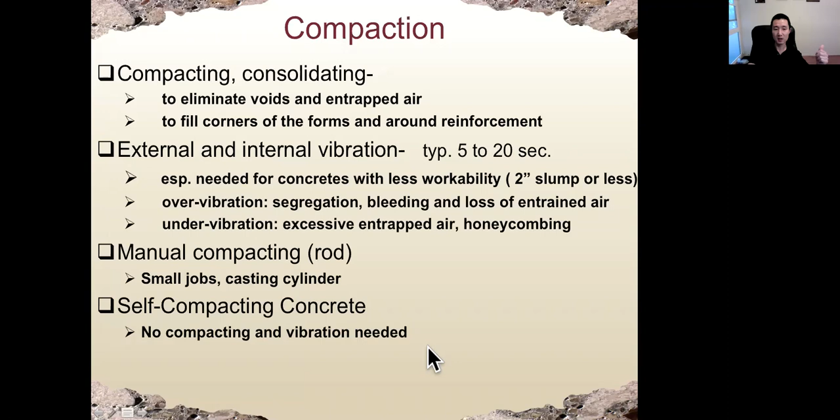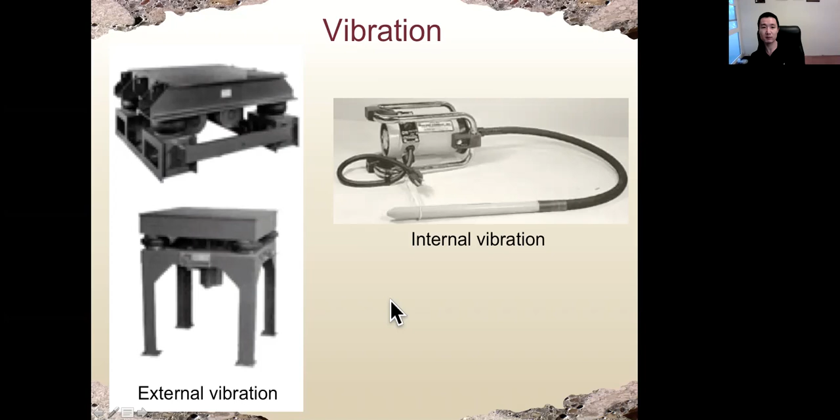So compaction is relatively simple compared with curing. Let's look at curing next.

The reason we cure the concrete is to prevent loss of moisture from concrete. Remember, hydration, which is the chemical reaction between water and compound in cement, needs water, at least 5 to 7 days -- the longer the better. Inside of concrete, if the internal relative humidity is less than 80%, the hydration process will stop. So that's one of the major reasons we need moisture at the early age of concrete.

Another reason is to reduce the potential for shrinkage, including plastic shrinkage and drying shrinkage -- we're going to talk about this more when we discuss shrinkage of concrete. But if the concrete loses moisture, it tends to reduce its dimension, we call that shrinkage. Too much shrinkage and the concrete will crack, because concrete is very weak under tension.

That's one reason: prevent loss of moisture from concrete. Another reason is to maintain a favorable temperature for a certain time, normally around 1 week. If the temperature is too low, below freezing, the concrete will first stop hydration, and second, it may crack because when water becomes ice, the volume will expand. We call that freeze and thaw attack. It is dangerous, especially when concrete is young at early age, so at early age the concrete cannot be frozen.

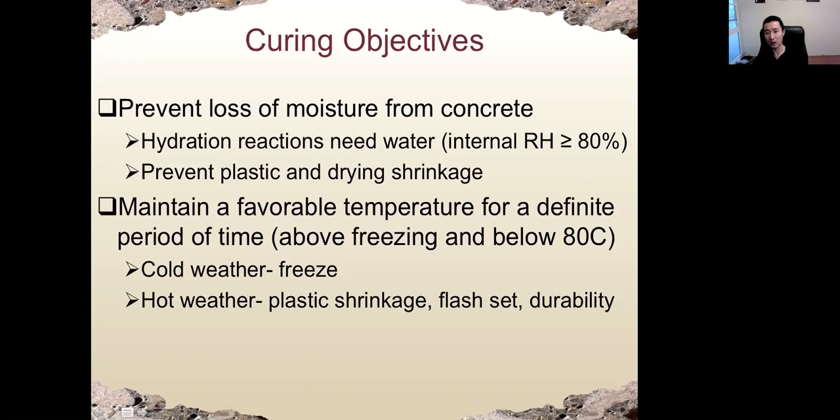A good curing requires 3 things. One is the moisture, the water. The second is temperature, cannot be too low, cannot be too high. And the third is the time should be long enough, at least 5 to 7 days. If any of these 3 factors -- moisture, temperature, and time -- is missing, the desired property may not be achieved. This is very important. Even if you design very good concrete, cast it perfectly, and compact it perfectly, if the curing is not there, the strength and other properties cannot be achieved. So curing is very important.

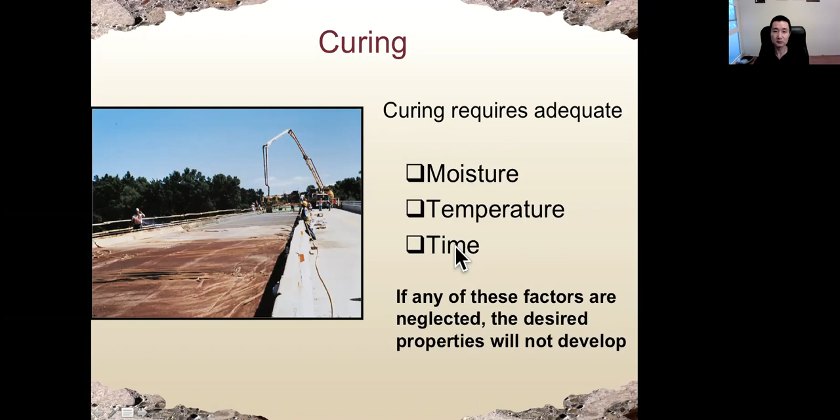All right, so effect of adequate curing on hardened concrete. A good curing will increase the strength of concrete because more moisture, moderate temperature, and long enough curing will ensure the hydration will go on. So we have more hydration product, the strength will be there.

It will also reduce the permeability, because again we have more hydration product. The porosity of concrete will be lower, so the concrete becomes less permeable. We also call that increased water tightness.

Because the strength is higher, abrasion resistance of concrete will also be higher. The resistance of concrete to freeze-thaw will also be higher, because first of all, concrete is stronger, and also it is less permeable. So water will have a harder time to penetrate the concrete and do the damage.

It will also increase the volume stability, which means we have less shrinkage. We have different types of shrinkage, including plastic shrinkage, which is shrinkage at early age of concrete, when the concrete is still in plastic state, or drying shrinkage, which is the shrinkage when concrete dries out and the water evaporates to the air. We call that dry shrinkage.

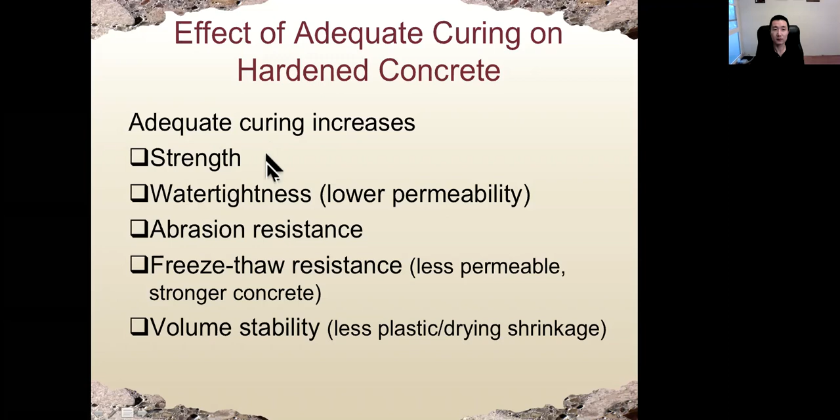All right, so let's look at these figures. Here shows the effect of moisture curing on compressive strength of concrete. The y-axis is the strength of concrete, and the x-axis is the age when we test the concrete strength.

So all four concrete, these four lines, have the same mix design: same amount of water, same amount of cement, sand, and of course aggregate. The only difference between these four concrete is the length of curing. The yellow line is the concrete in the air the entire time, so no moisture curing at all.

The green line is in the air after 7 days of moisture curing, so this is typical curing time, around 5 to 7 days. The red line is the concrete in the air after 28 days moisture curing. And the last one is moisture curing the entire time before we test its strength.

So again, all the concrete has the same mix design, but obviously the strengths are quite different. What we can see here is the longer we moisture cure the concrete, the strength will stop increasing at a later age. For example, the concrete cured in moisture all the time, the strength almost keeps increasing over a year. So as soon as we stop moisture curing the concrete, the strength will stop increasing almost immediately.

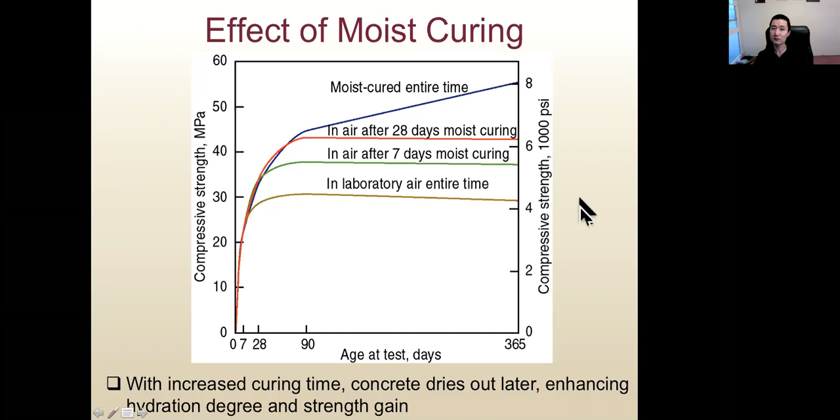And this slide shows us the effect of curing temperature on strength. Again, all these 1, 2, 3, 4 concrete have exactly the same mix design. The only difference is the casting and curing temperature. For example, the red one means the casting temperature is 23 degrees Celsius, or 73 degrees Fahrenheit, and the curing temperature is the next temperature, also 23 or 73 Fahrenheit.

All right, so the red line is the concrete cast and cured at room temperature, around 70 degrees. The blue line here is we cast the concrete and cure the concrete at 90 degrees Fahrenheit. So compared with the red line, the early age strength, which is the strength for the first week or so, will be higher.

It is easy to understand because increased temperature increases the speed of chemical reaction, so we have more hydration product and the concrete will be stronger. However, the strength after around a week or so will be lower when we increase the curing temperature.

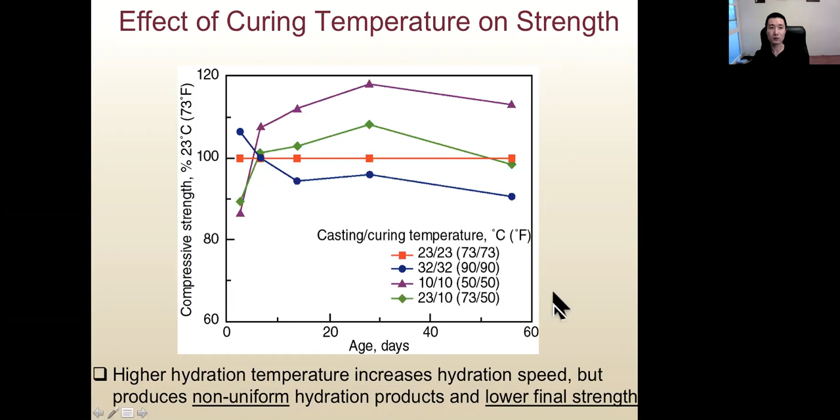So the temperature effect on curing, here is a summary. The higher the temperature, the faster the curing. The higher temperature, we have faster hydration speed. The best temperature is room temperature, which is very convenient for us.

The stronger concrete is made at temperature around 40 degree Fahrenheit. The freezing temperature is 32, so it's just above the freezing temperature. But it is not very practical to cure the concrete around 40 degree Fahrenheit. The stronger concrete is made at around that temperature, just above freezing. That is because hydration will keep going on since the temperature is not too low, above freezing, but it is very slow, so we have very homogeneous hydration product.

But the best temperature is still room temperature because it's very practical. We don't have to do anything to achieve that. If the concrete freezes during the first 24 hours, when the water becomes ice, hydration will stop, so it may never be able to attain its original properties. So keep the concrete above freezing temperature at early age.

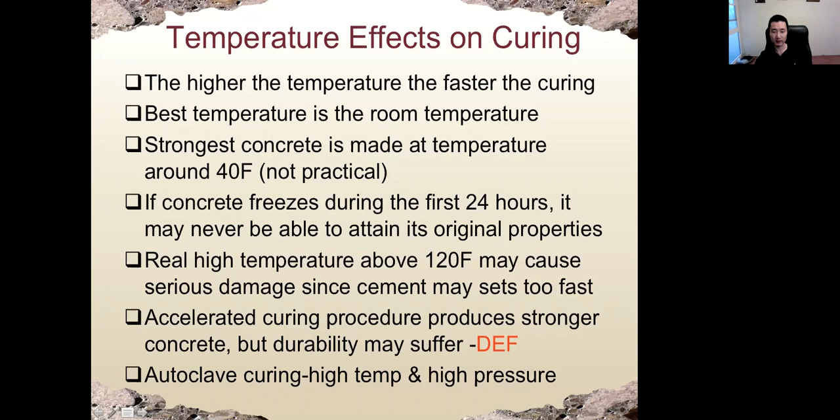We can also further increase the curing temperature and even apply high pressure. High temperature and high pressure, we also call that autoclave. That will change the chemical reaction of concrete totally. This is not very common in use, but it still belongs to special curing. We're going to talk about this again in a moment.

Let's look at how we cure the concrete. Probably everybody has seen that before. When we cure the concrete, we need to cover the concrete surface, or we apply some additional water. So that's three types of curing methods. The first one, which is also the best one, is to supply additional water by spray, ponding, or immersion.

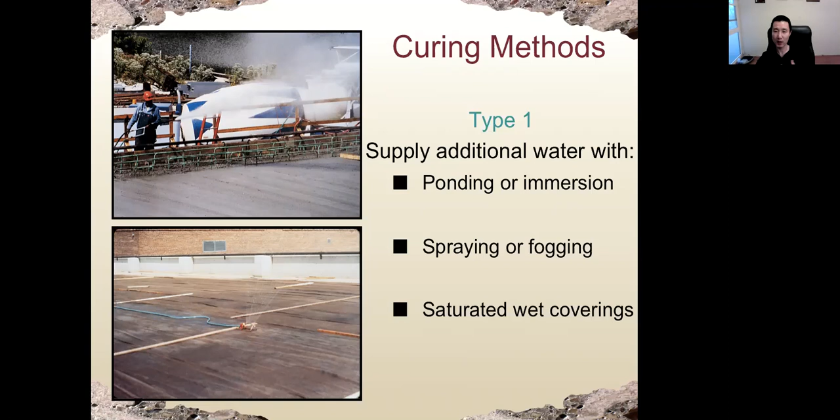After the concrete sets, this is the best way to cure the concrete: providing additional water to it. The reason we call that the best is because when we provide additional water, we have a water layer on top of the concrete, which ensures every part of the concrete is saturated, so every part will keep hydrating because we have water there.

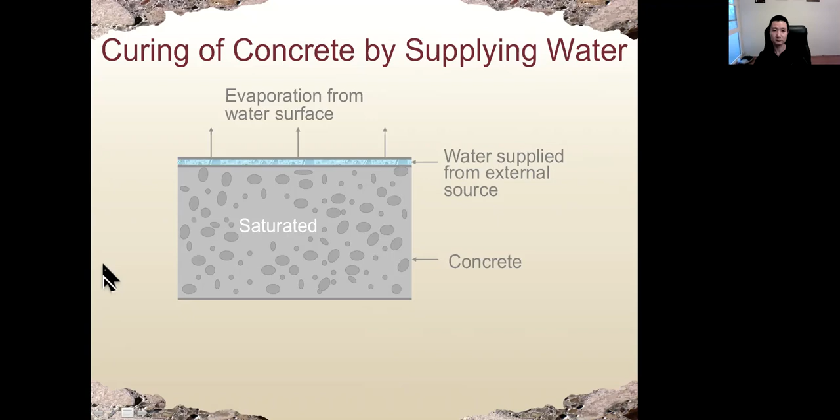The second type of curing: we do not provide additional water, but we seal the concrete using plastic sheets. Like here, what we spray is not water, it's a membrane-forming curing compound, so it will form something like a plastic sheet, and the water from the concrete will not evaporate.

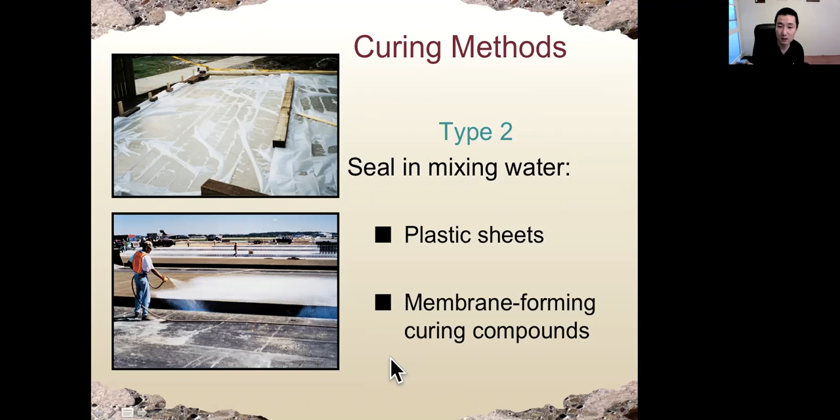So the second type, sealing the concrete, is okay, but not as good as the first type, because not every part of the concrete is saturated. By putting on plastic sheets or curing compound, part of the concrete is saturated, but the part near air is only partially saturated, meaning the hydration there may not be fully developed.

Compared to the first type method, it is more convenient and also lower cost because we do not need to provide actual water. But it's not as effective as type one, and it cannot entirely prevent evaporation. Part of the concrete is only partially saturated.

Another reason it is not as good as the first one is for concrete with lower water to cement ratio, it may suffer so-called self-desiccation and a type of shrinkage we call autogeneous shrinkage. When the water cement ratio is very low, below around 0.35, we do not have enough water, because hydration consumes a lot of water. If the ratio is low enough, the concrete will dry out due to hydration. We call that self-desiccation, meaning the water is consumed due to hydration inside the concrete.

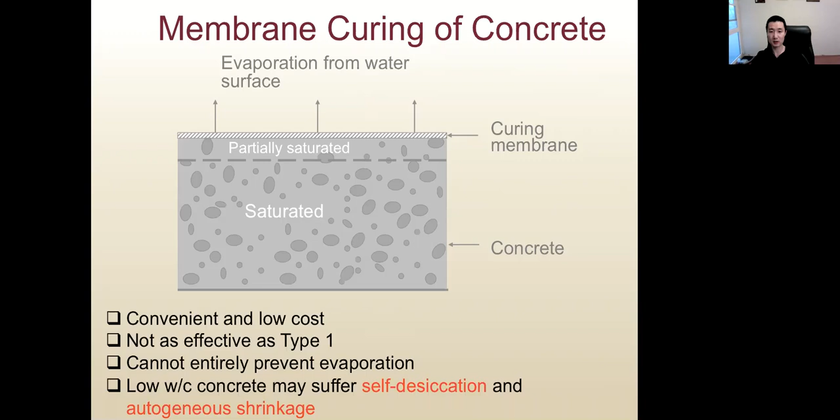The third curing method, type 3, is we use live steam. We increase the temperature by providing hot steam. This is only used in precast plants because in the field we cannot use live steam. In winter construction, we could use heating coils or electrically heated forms or pads to ensure the temperature of the concrete will not be too low, will not be below freezing temperature. Remember, when water becomes ice, hydration will stop.

When we talk about hydration, we talk about dissolve, diffuse, and precipitate. The water will dissolve ions such as hydroxide and calcium ions from the surface of clinker. We need liquid water to do that. When the water becomes ice, hydration will stop because there's no dissolve, no diffuse, and no precipitate. Keep that in mind.

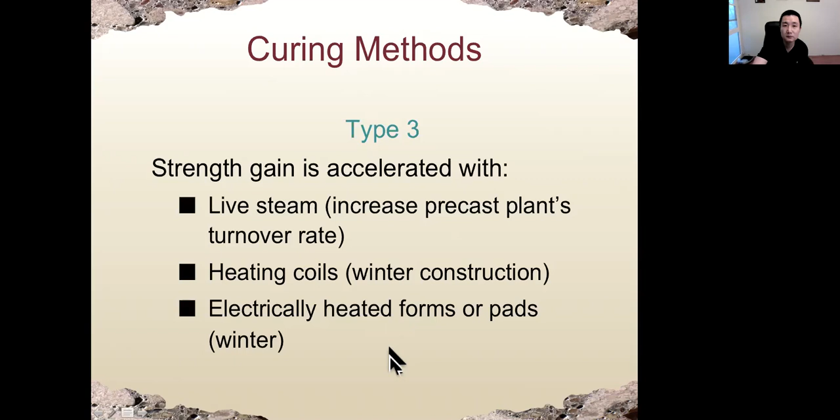Here shows a special curing method, we call that steam curing. We increase the temperature quite a lot. This shows how we do the steam curing of concrete. The x-axis is the time after placing the concrete, and the y-axis is temperature within steam, in degrees Celsius.

We have a delay period. After we finish the concrete, we do not put it into steam curing immediately. The reason is we want the concrete to achieve certain strength, so we wait around 3 to 5 hours before we increase the temperature. Then we slowly increase the temperature; we do not suddenly put the concrete into hot steam curing. That temperature increase period is around 2½ hours also.

If we put the concrete into steam curing immediately, we may have cracking, because the temperature increase is too high and we may have a temperature gradient inside different areas of the concrete, so it may crack. Then we keep the concrete temperature constant for a certain amount of time, between 6 to 12 hours — we call that the constant temperature period. The temperature may vary, around 60 to 80 degrees Celsius.

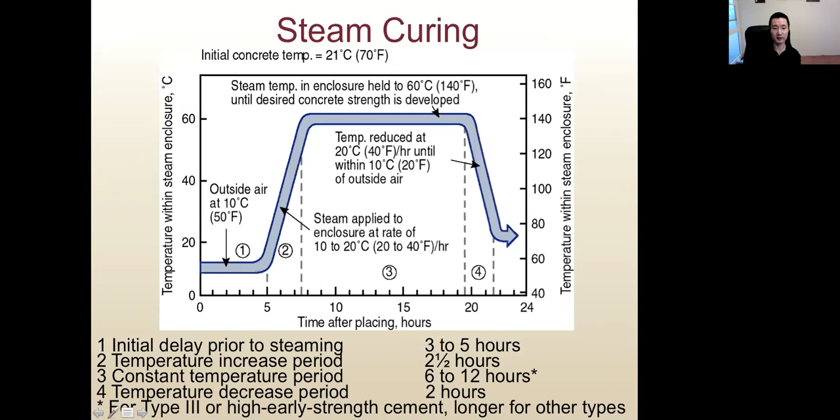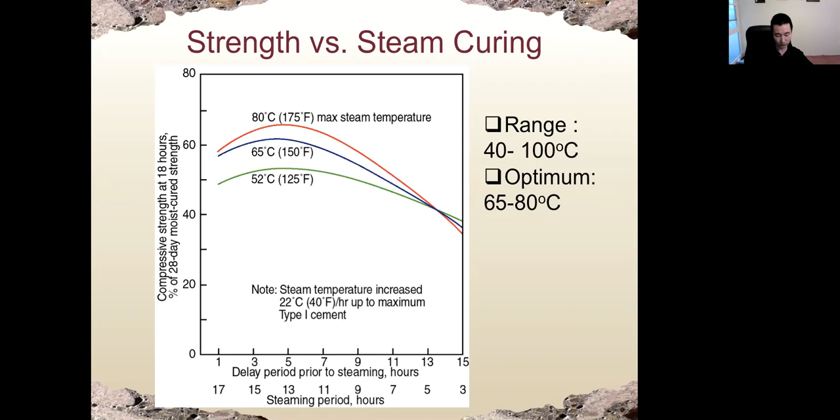If we increase temperature above 60, 70 degrees, it may cause delayed ettringite formation. Remember, ettringite is one of the hydration products of C3A. We have 4 major compounds: C3S, C2S, C3A, and C4AF. Ettringite is one of the hydration products of C3A, and when C3A becomes ettringite, the volume will increase.

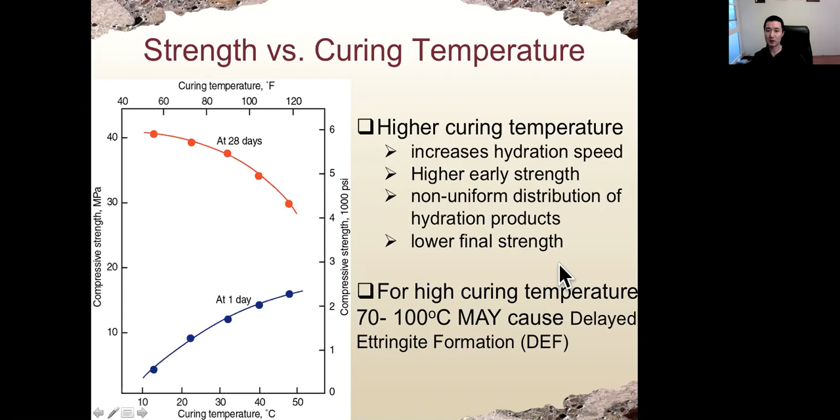So this is curing temperature.

Autoclaving: we put the concrete under very high pressure and also very high temperature, way beyond steam curing temperature. Steam curing temperature is around 60 to 80 degrees Celsius. Autoclaving is above the boiling temperature of water, 160 degrees Celsius and beyond, with very, very high pressure. Because the pressure is very high, the water in the concrete will not boil. It's about 6 to 20 times atmospheric pressure.

So we have a totally new hydration reaction and new hydration products, very different from the chemical reaction at room temperature we discussed in earlier lectures. It's only used in the precast industry because we cannot bring this autoclaving oven into the field.

But the strength gaining speed is very high; we can achieve 28-day strength normally in 24 hours. The concrete will have better sulfate resistance, less shrinkage, less creep - better performance overall. But again, it's only used in the precast plant, and the size of the concrete cannot be very large because we need to fit it into the autoclaving machine.

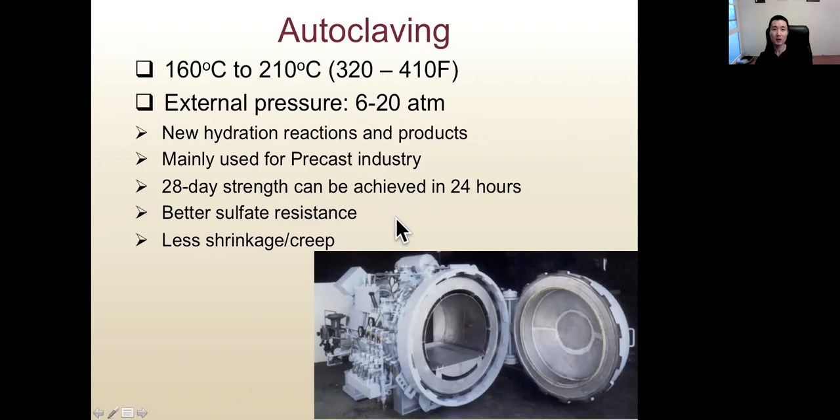All right, so today we talk about the curing of concrete. We should provide a lot of water to concrete for long enough time, and the temperature cannot be too high or too low.

Do not let the concrete dry, especially at early age, at least for the first week, because dry concrete equals dead concrete, meaning there's no chemical reaction in the concrete once it dries off. Actually, if the internal relative humidity of the concrete is less than 80% - and 80% is not very low - all the chemical reaction will stop.

After the concrete dries out, even if we put it in water, the chemical reaction cannot be restarted. We cannot revitalize concrete after it dries out. So we keep it moist for the first week; it cannot be dried out. So moisture is very important.

The temperature is also very important. If temperature is too low, the water becomes ice and the concrete will crack. If concrete temperature is too high, we may have delayed ettringite formation, the chemical reaction may change, and we may have flash set, which makes the concrete set in a few minutes. Not good.

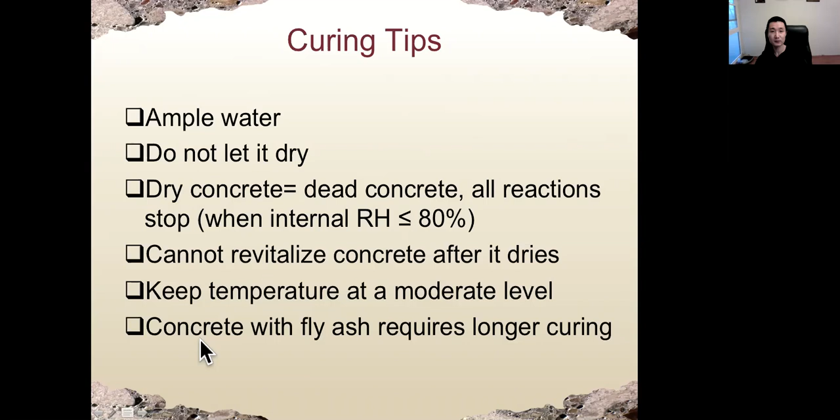All right, key ideas for this lecture: why compaction is important. We need to get rid of entrapped air, ensure the concrete fills every corner of the formwork with no honeycombing, and ensure the concrete wraps around the steel reinforcement.

What kind of parameters affect curing? Temperature, time, and moisture - the 3 parameters. How does temperature affect curing? Not too high, not too low. And how to prevent moisture loss during curing? We could provide external moisture, or we could seal the concrete using plastic sheets.